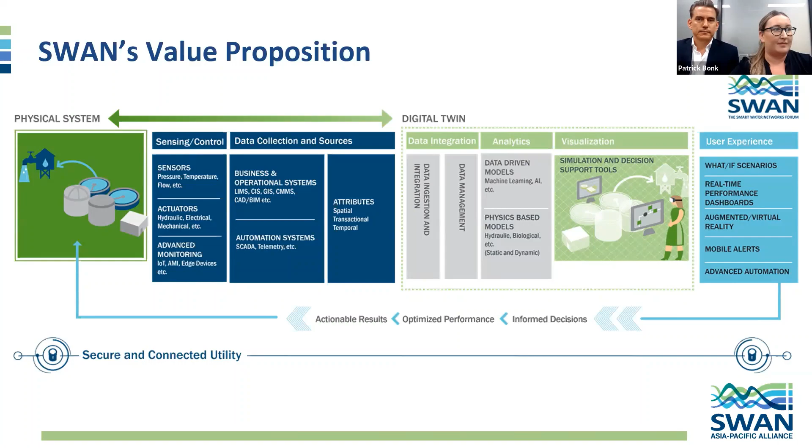Hi everybody, I'm Shanshan from National Chiao Tung University. I'm also the Secretary General of Water Affairs Organization, Taiwan. It's my pleasure to present the development status of the smart water and wastewater platform in WAOT.

Let's introduce WAOT first. It's a close co-work partner with industry, government, university, and institute to develop the water industry, including raw water, drinking water, wastewater, and new water. We are also the exchange platform for business and technology, and especially we focus on smart water and wastewater technology.

So we recommend two members of WAOT: one is from GSD for smart wastewater, and the other one from Stantec for smart water. Later, they will have two presentations.

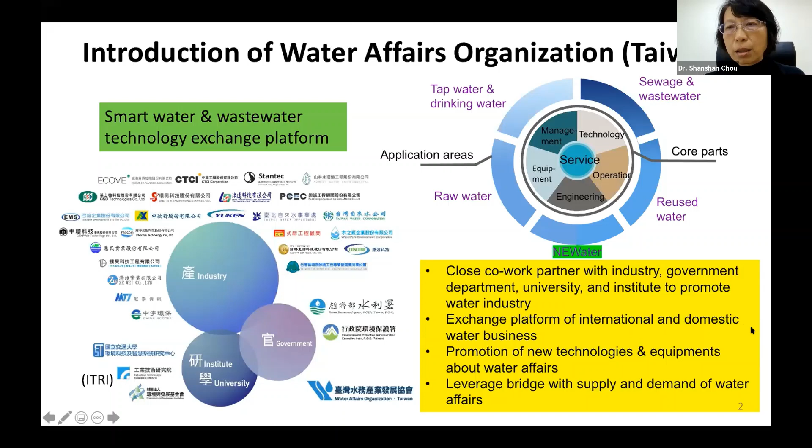Actually, we just held the Intelligent Water Forum 6 days ago in Taiwan. You can see everyone wearing masks in the meeting room. I think it's a special experience since in Taiwan we still can hold a face-to-face seminar during a COVID-19 year.

We had a total of 6 presentations: 2 for water and wastewater from ITRI and GSD. ITRI, the Industrial Technology Research Institute, is a very famous institute in the world, and I also worked at ITRI for over 20 years. There was another presentation on wastewater from ITRI and NCTU, and one on smart water from Taipei Water Department and Taiwan Water Corporation. So, next.

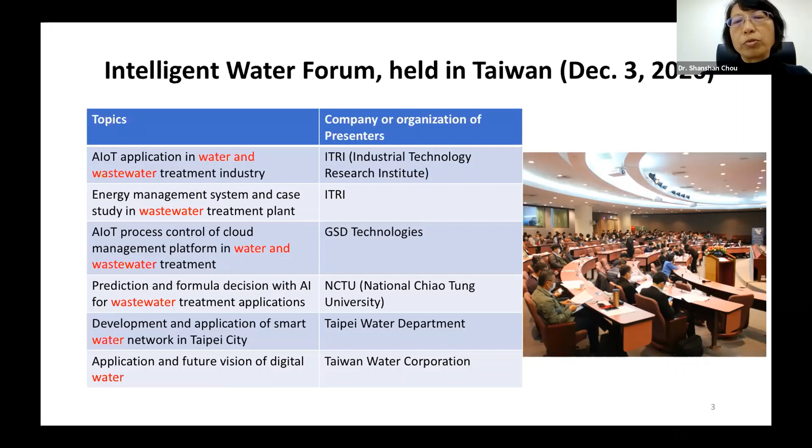I think in Taiwan we have a good multidiscipline integration opportunity, since Taiwan has many good AIoT and ICT component companies. From digitalization and visualization for IoT, to data analysis and data algorithms for AI, Taiwan has good AIoT hardware and software capability. ITRI and WAOT members help the Taiwan government build demo sites, going from intelligent components to intelligent processes, then to intelligent total solutions. So we have many demo sites for different applications. Next.

This presentation shows the prescriptive analytics developed by NCTU, which is an optimal model. AI can determine the lowest cost according to the removal of COD, color, or turbidity from the model. You can see about 20 to 40% of operating costs can be reduced according to the AI decision. Next.

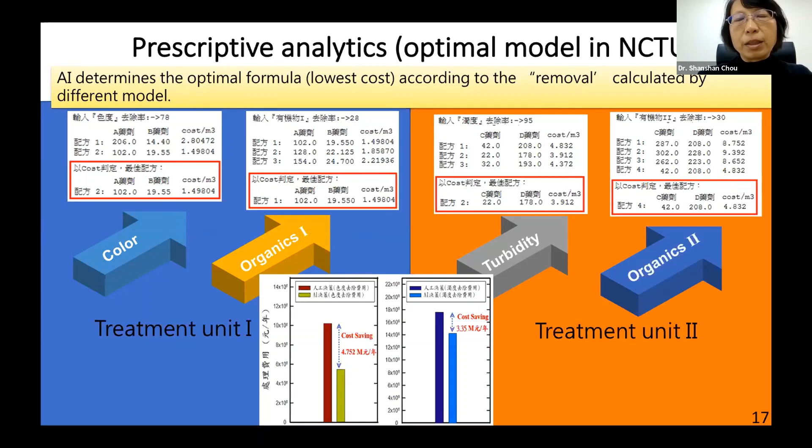This slide shows the smart water status in Taiwan, and 2 famous case studies. One is the smart water network in Taipei City, including the raw water treatment plant through to the end user, from raw water monitoring to clean water quality control. Another is the smart water meter. The benefit is about 40% of water leakage reduced, and 30% of power consumption reduced. Another successful example is smart water supply in the Matsu Islands.

Later, Dr. Chou will show you more. So, next.

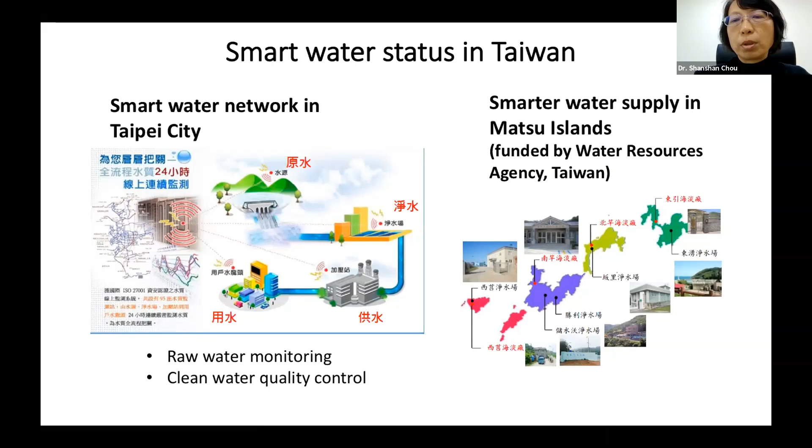Finally, I'll show the smart wastewater status in Taiwan. You can see the smart wastewater management platform developed by ITRI and GSD. The right side is the remote control center developed by ITRI. The left side shows 5 layers developed by GSD, in addition to the 3 common IoT layers in the middle. GSD added 2 layers: one at the bottom, the equipment layer, and the other at the top, the decision maker layer.

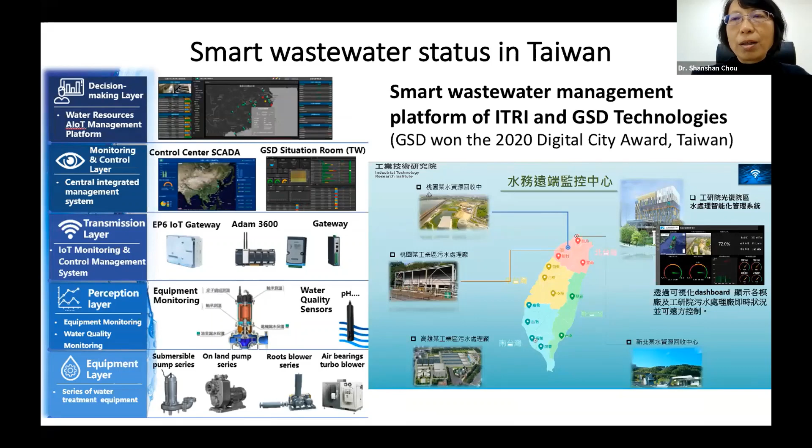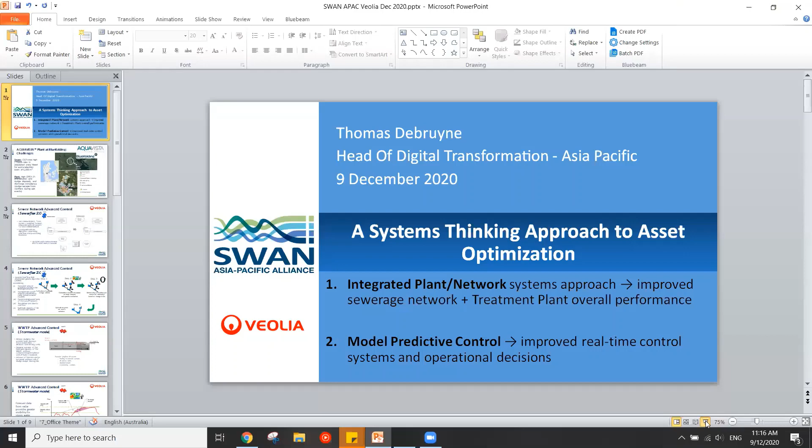Good morning, everyone. Can you hear me well? Yes, we can hear you. Thank you. All right, can you see my screen well? Good, it looks like I'm sharing.

Good morning to you all. First of all, I'd like to thank the Smart Water Networks Forum for allowing me to present this exciting project today. We'll go quite fast since we have a lot to cover in 10 minutes, but feel free to ask any questions during the Q&A session at the end. Today we're going to cover the system thinking approach to asset optimization. If you give me a minute, I'm going to hide this. Yes, that's better. To asset optimization.

So what does it entail exactly? First, we're going to present what the integrated plant network approach is about and how it has improved overall performance. We'll also go through model predictive control, MPC, in a nutshell, and how this has helped the utility and Veolia improve operational decisions.

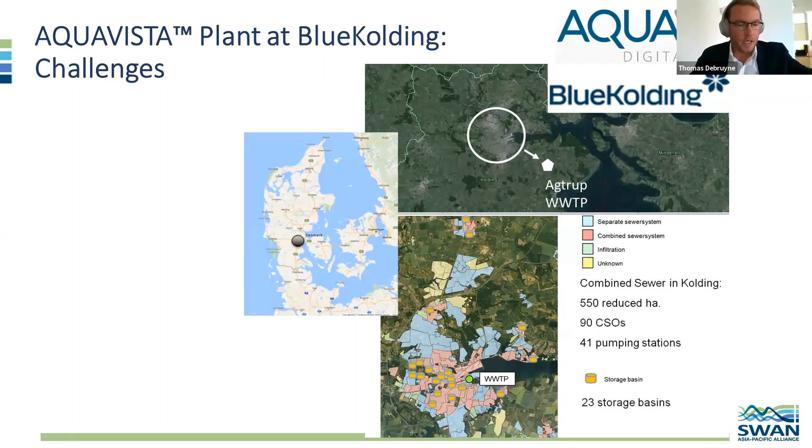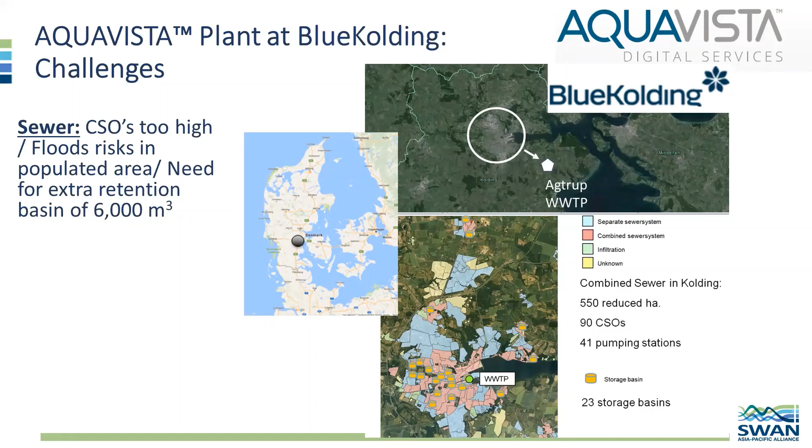Let's have a look at the challenge first. The combined sewer overflow was too high, I'll provide some numbers later. We had flood risks in a populated area, and in a nutshell, a need for an extra retention basin of 6,000 cubes to cope with it. At the wastewater treatment plant, we had very high OPEX for phosphorus precipitation and removal and associated sludge disposal, plus compliance issues due to sludge escape from the clarifier, especially during storm water events. The total overflow at this stage was 150,000 cubes a year, across 30 to 35 events.

And the idea was to reduce to below 6,000 cubic meters a year and number of combined sewer overflow events of less than 10 events per year.

So in 2011, BlueKolding, in collaboration with Veolia Water Technology Kruger, implemented a module called Sewerflex. And after 7 years of successful operation, we upgraded to predictive control. That is what I'm going to introduce today.

I'm going to present at a very high level what we did on the sewer side, and then on the wastewater treatment side. The idea is not to go through in detail—we can explain further during the Q&A—but to present how the integrated approach between both provided benefits between the sewer and the wastewater treatment side.

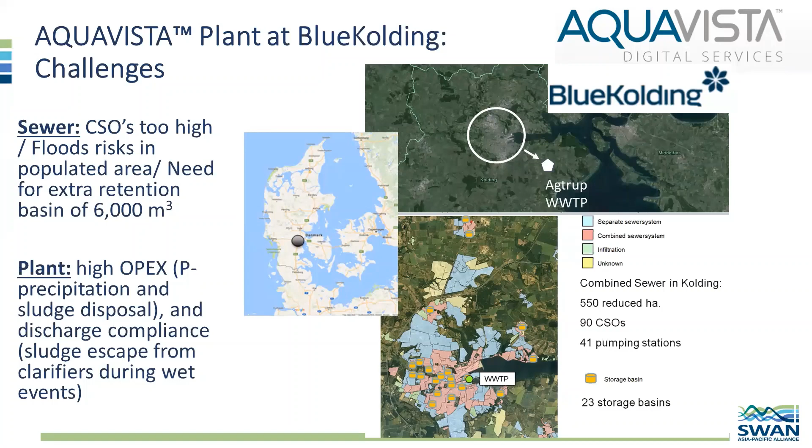On the sewer side, let's start with reactive control versus predictive control. In reactive control, we look at the current status of the different storage basins and flow, and activate actuators based on level, flow rate, and so forth. The idea was to upgrade to predictive control, considering both the weather forecast, using radar data as well as rain gauges.

But also the current status of the different storage volumes and so forth. Instead of saying if the water level is at X, then we action at Y, the idea is to predict: if the future water level, estimating a runoff, will be X, then we action at Y, being either a gate or a pumping station, for instance.

That is updated with measurement and associated set point at a very high granularity, every 5 minutes or so. It's done via a platform called AQUAVISTA, a cloud-based platform from Veolia Water Technology. It is a very highly secured digital portal used by both a third party and the client. The communication is done via an OPC bridge.

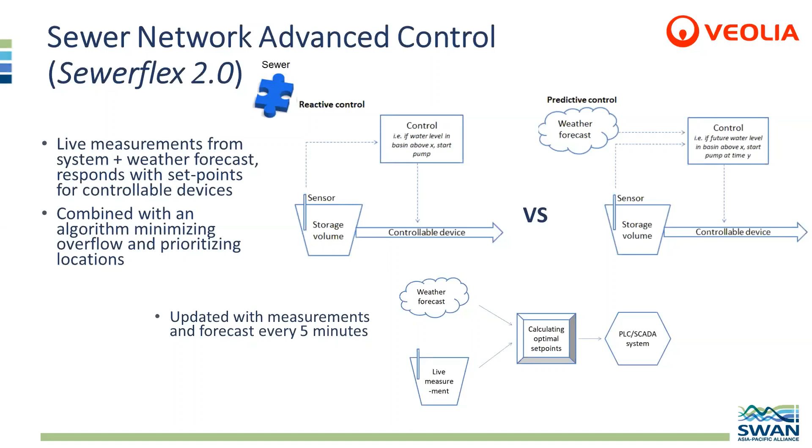The idea is to calculate the different optimal set points using a genetic algorithm, which I'm going to present on the next slide, and to communicate back the different optimized set points to the PLC SCADA system every 5 minutes.

So it is based on a dynamic overflow risk assessment principle that we developed in-house, considering a few different factors: the water volume at the different basins, the expected runoff to come based on forecast data, and estimated uncertainty as well.

Risk mitigation—number 4 is the most important point, the relative cost of the overflow at the different locations—and of course the current state of the hydraulic capacity of the downstream wastewater treatment plant. I will come back on that later.

If we go through the different steps, it's quite simple actually. We estimate the different water storage volumes at stage 1, then based on what's to come—the different runoff modeling and radar forecast—there will be a calculation of the combined sewer overflow risks based on the runoff and specific factors of the different basins.

After that, there will be some calculation made to minimize the overflow risks based on location across the different catchments. Then an optimal set point will be sent to the local PLC SCADA to be actioned, again done every 5 minutes. I would like to come back on point 4, which is the innovation behind this.

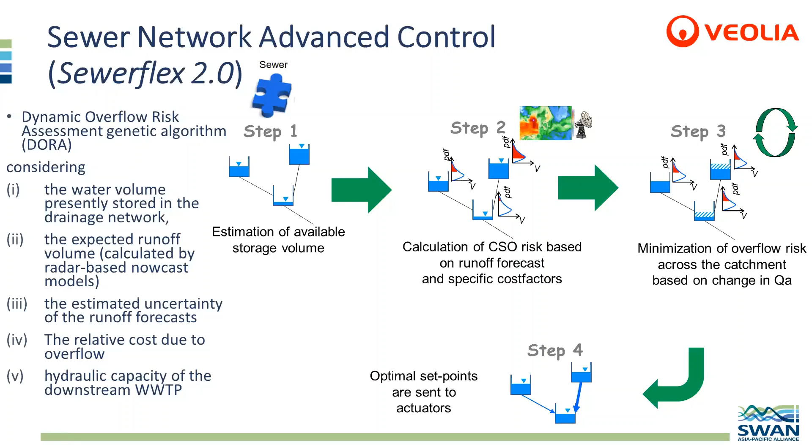On the wastewater treatment side, again very much in a nutshell, we have put in place a mode that we call Stormwater mode. It's an operational mode triggered by the inlet flow or the predicted flow and the current activated sludge distribution status in the system.

The idea is to retain a higher amount of sludge in the process tank to minimize the sludge blanket level in the clarifier, to minimize sludge escape in case of a high wet weather event.

Now, the settling capacity is based on the activated sludge plant, and I will show you an example just after that. So you might have heard of the system before called aeration tank settling. You have a quick example here on the right where it's a simple plug flow activated sludge system.

The idea is when the storm water mode is triggered to allow for further settling of the sludge in the aeration basin, in the aeration anoxic remaining section, and a lower MLSS content to go through the clarifier downstream to avoid sludge escape during a high wet weather flow.

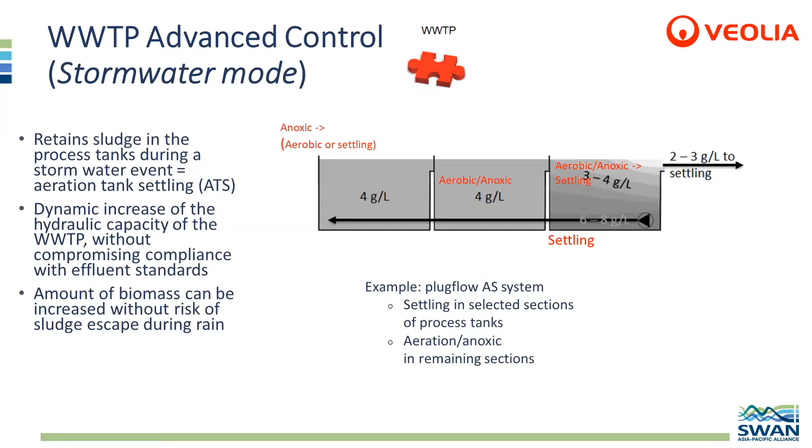Now, it is a dynamic system, as we will see after that. It is activated and deactivated based on the weather forecast and the current status of the inlet flow as well. Like for the sewer system, prediction is everything, and it's changing the way we look at this feature as well. So the forecast data from the radar can provide much greater visibility on the stormwater feature.

If we're able to predict a high wet weather event based on the level we have on the upstream sewer network, but also radar data, we will be able to get the wastewater treatment plant ready upstream and get the plant ready before there is a high inlet flow coming and avoid altogether sludge escape from the clarifier downstream.

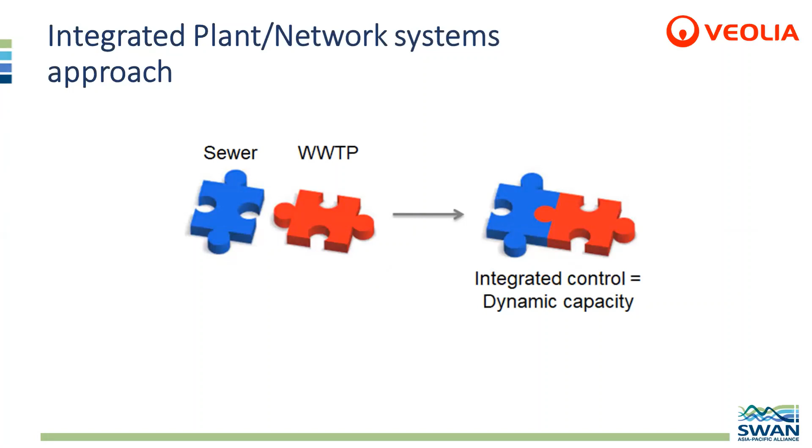Sewerflex, which was a module that we discussed about, obviously can predict the inflow into the wastewater treatment plant based on simple modeling and forecast data, which will be, of course, a great bonus to know what's coming to us.

But also we can equalize the flow rate during dry weather, as people who understand biological treatment know, having a stable flow rate with hydraulic and biological intake is of great benefit.

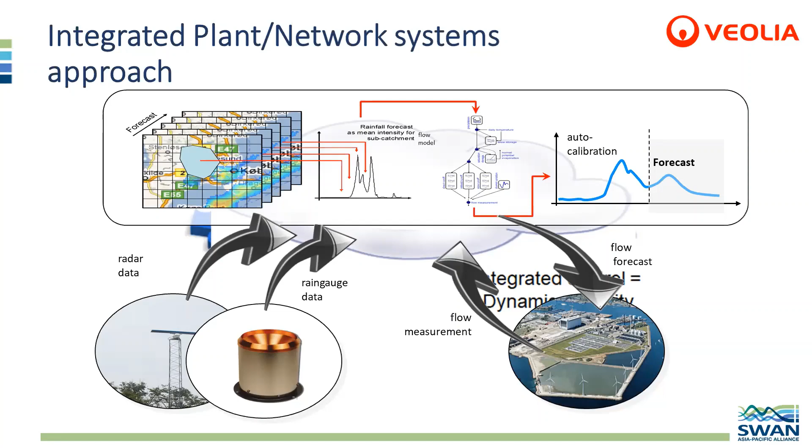But also during high wet weather flow, the idea is to optimize the flow using the extra capacity we might have on the sewer side while mitigating combined sewer overflow risks as well.

So it is always considered, and I will go a bit fast because I'm late, as a combination of conventional upgrade and upgrade using SMART in a nutshell.

So the status before, as explained in the introduction, was our current retention basin of 800 meter cube. We could have gone using traditional thinking to 6,000 cubes to be able to overcome the issue we have at the start. And we came down in 2011 in upgrading the retention basin to a much lower capacity, providing savings of 2 million euro.

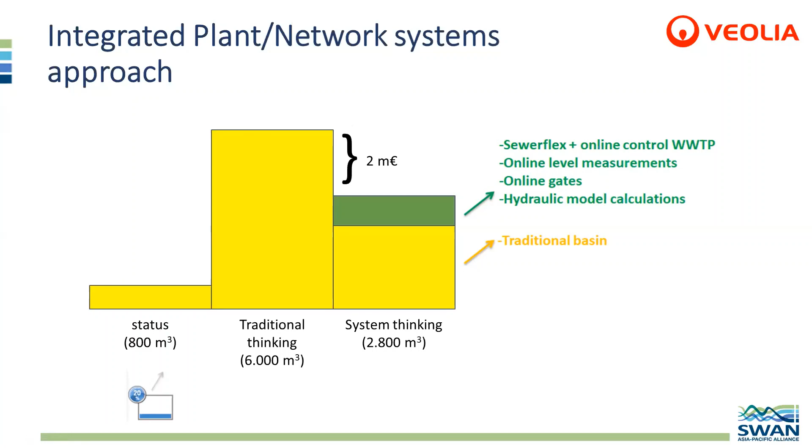But on top of that, implementing advanced control and predictive control in place to ensure that we remain compliant and at the same time use both capacity in combination of the sewer and the wastewater treatment plant. To conclude, that's a slide of the current benefits.

We've been working with BlueKolding for 20 years now. The benefits you see here on the right have been provided by the features we talked today, but not only. We have implemented other optimization features as well. We won't have time to go through them today. I will be happy to do so at a separate call if you like, and that has been providing great benefits to BlueKolding and Veolia at the same time. Thank you for your attention.

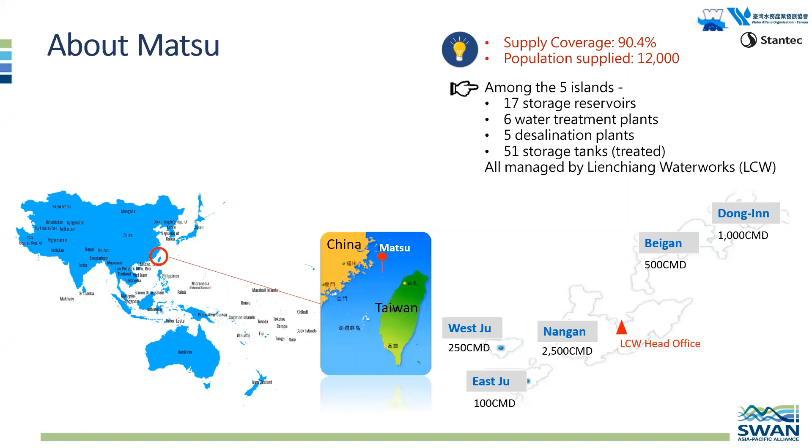A lot of the issues and challenges for LCW are actually related to its remote location. Aging infrastructure and supply and distribution issues are faced by almost every other utility in the world. However, the remote location is a disadvantage for LCW because world-class solution providers and equipment vendors are less likely to be attracted to such a small island to sell their best products. Being so remote, you don't see a big influx of fresh graduates or experienced engineers coming to work in such a small place. So there's generally an insufficient number of skilled or experienced operators for LCW, and more generically, there's a shortage of manpower, which is already affecting their customer services.

On the management side, currently there's a lack of means for information to be shared across different islands, and the level of monitoring is insufficient. So it's a bit hard for LCW to be able to see and hear what's going on in some of the other islands, and to explore and find out about problems, let alone to actually improve on their supply efficiency.

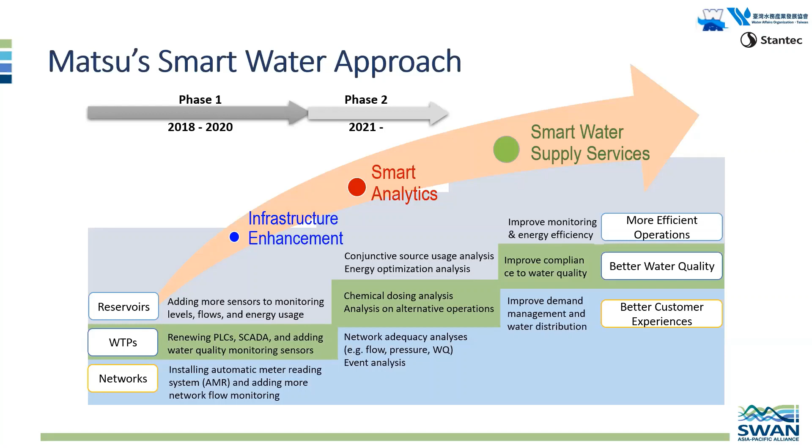They're trying to improve the infrastructure within phase 1, and after that foundation has been laid, once all the data information starts flowing, they'll be ready to move into phase 2, which will focus on smart analytics to establish baselines, identify bottlenecks, and resolve events at a much faster rate. Eventually, LCW wants to be able to achieve what they call smart services, which on the right-hand side include more efficient operations, better water quality, and better customer experiences overall.

So phase one took place between 2018 and is still happening to date. Part of it is to make sure this catchment to tap approach, all the way from raw water to finished water, infrastructure can be built up to support the next phase smart water solution implementation, and also to make sure LCW is able to look at all the data information from their head office.

Underneath in the table is just a summary of major items and quantities. More notably is the AMR meters. This is a 100% coverage AMR system, so across the 5 islands, every single account would have an AMR meter installed. I believe that's the first of its kind in Taiwan, and maybe the same for Asia.

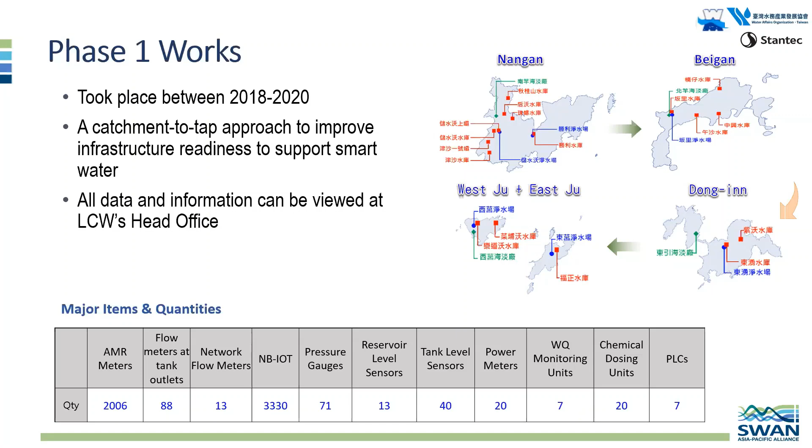There's already been some early gains opportunities, and LCW made sure these have been captured. On the left-hand side, with AMR, you don't have to wait for and rely on your meter readers to come back every 2 months before you can identify a usage problem.

So this is what happened. They look at the AMR usage, and LCW found out this local restaurant in the picture here to have an unusually large usage. So they decided to pay them a visit. Together with the owner of the restaurant, they quickly found out that they left the tap running in the backyard, and turning this off helped the owner save 92% of their water bill in the next water bill.

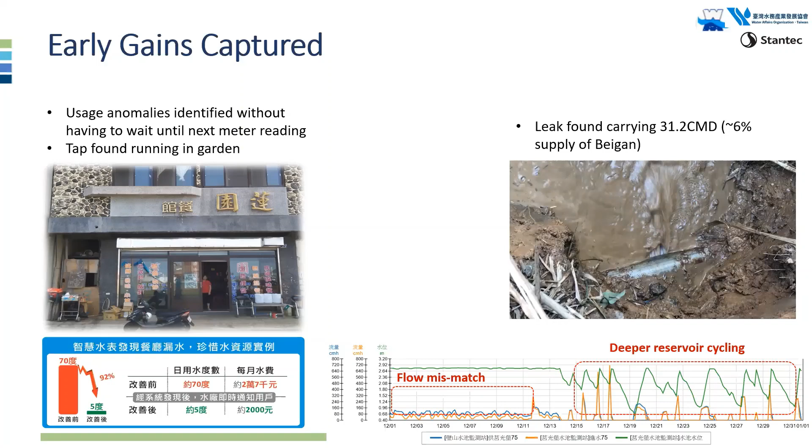Although this is beyond the customer meter, and whatever gets wasted actually gets paid to LCW, this is about being ethical on an island that has water resource restrictions. So you've got to do the right thing, basically. On the right-hand side, also under the AMR system, leaks are quicker to be identified and repaired.

So what's ahead for Matsu? Over the next 3 years, the focus would be on smart analytics and using it to make sure benefits can be derived for both the utility and also for the customers.

Initial successes of Matsu has also boosted confidence levels for many other utilities across Taiwan, and some of these utilities are already planning similar things for their own water supply. So this would mean business opportunities for all of us.

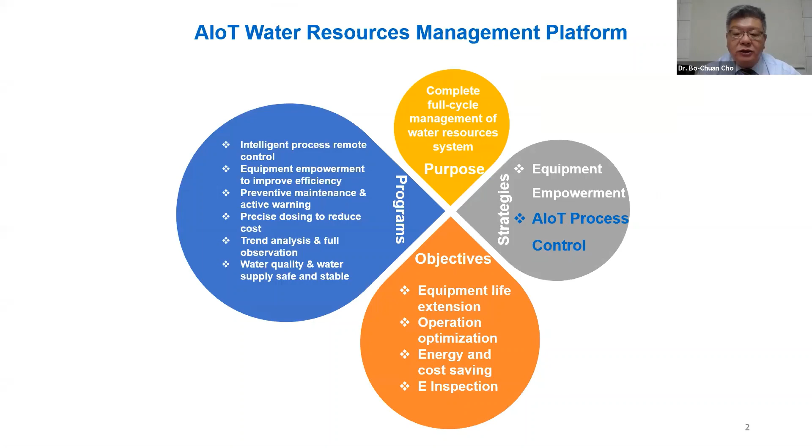AIoT Process Control for Water and Wastewater Treatment application is one of the developed strategies in GSD's AIoT Resources Management Platform. The purpose of the AIoT Process Management Platform is to optimize operational performance in water and wastewater treatment systems.

This AIoT Process Control Management Platform includes intelligence process monitoring and control modules, and AI simulation and prediction models, which are developed by edge data collection and computing from water and wastewater treatment processes.

Being consisted of biological and chemical programs, this AIoT process control management platform aims to achieve the objectives of operation, energy, and expenditure optimization through procedures of real-time monitoring, dynamic control, intelligent operation, and AI tuning.

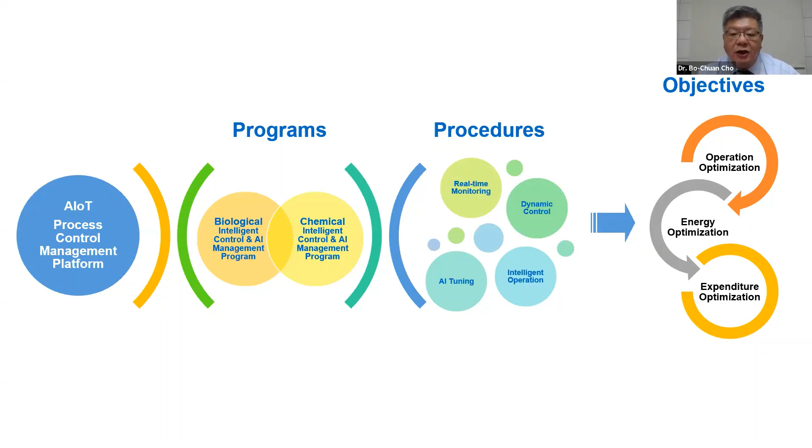There are 8 intelligent process monitoring and control modules, 4 AI control generation models, and 4 AI simulation and prediction models in biological intelligent control and the AI management program, which can be applied to A2O, AO, and activated sludge processes.

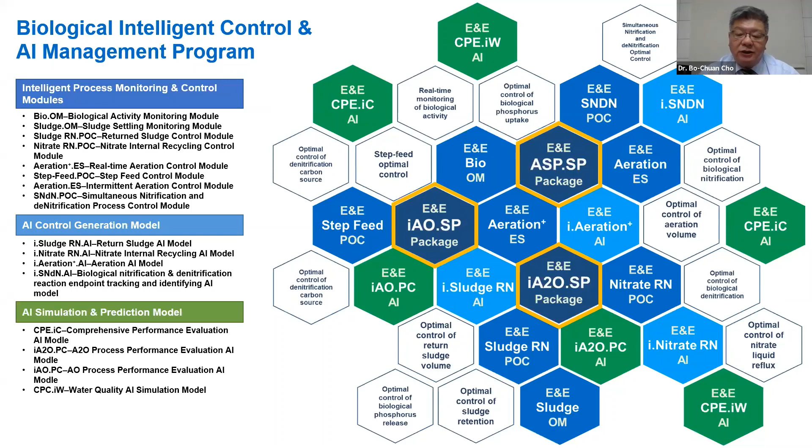The operational results show that the total nitrogen, ammonia nitrogen, and total phosphorus removal rates can be increased to 79.7%, 94.5%, and 99.5%, respectively, by biological intelligent control and the AI management platform.

Blower's average power savings are 32.3%, 31.9%, and 46.1%, respectively, in A2O, AO, and activated sludge processes. Total power savings are 24.7%, 33.1%, and 59.8%, respectively.

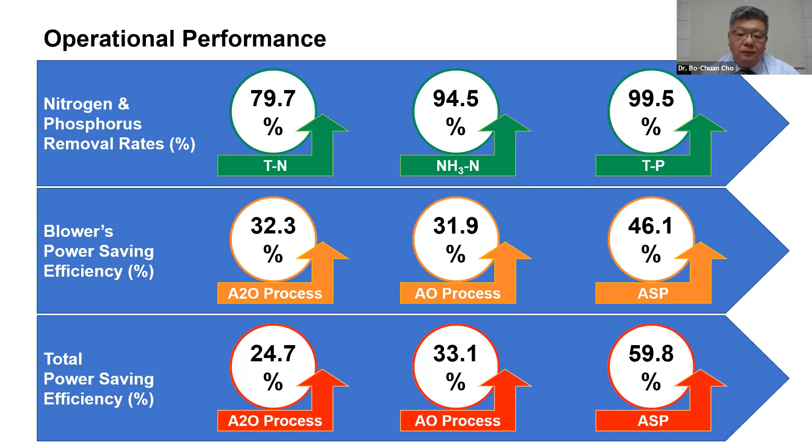The Chemical Intelligent Control and AI Management Program includes 8 intelligent process monitoring and control modules, 1 AI control generation model, and 2 AI simulation and prediction models for chemical neutralization, oxidation reduction, coagulation and precipitation reactions, and advanced oxidation processes.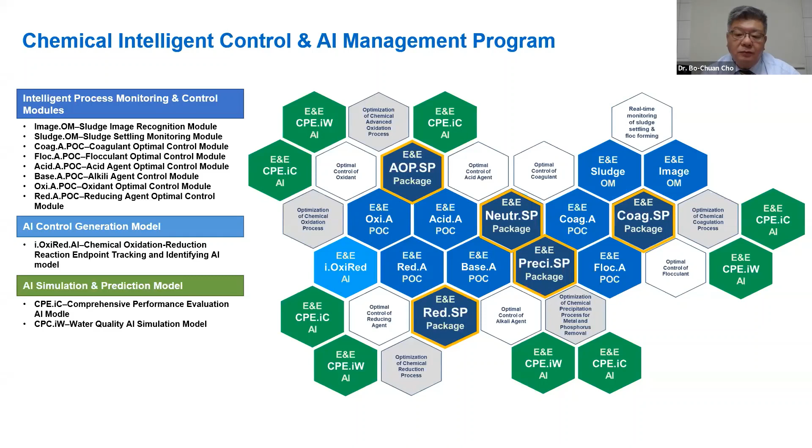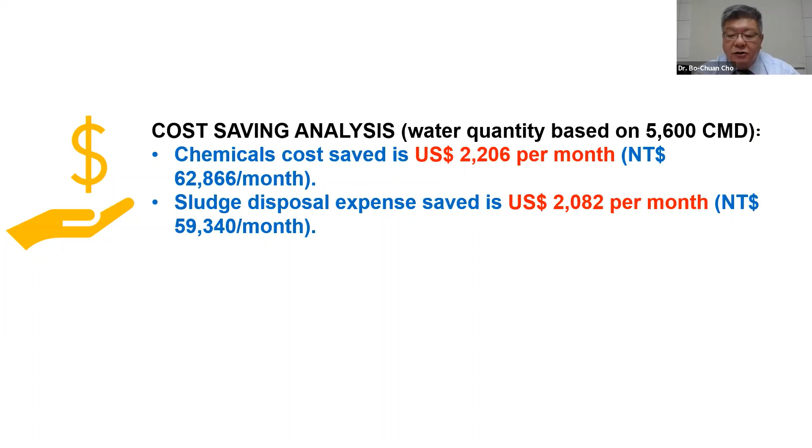During the Chemical Intelligent Control and AI Management Program applied to the semiconductor wastewater treatment plant, the saved chemical dosing cost is $2,206 per month, and the sludge disposal expense savings is $2,082 per month, based on a water quantity of 5,600 cubic meters per day.

Our verification cases reveal that GSD's AIoT intelligent control and AI management platform have distinguishing features of real-time dynamic control, empirical knowledge in collaboration, control decision mastery, control module independence and adaptability, control target accuracy, and intelligent control optimization.

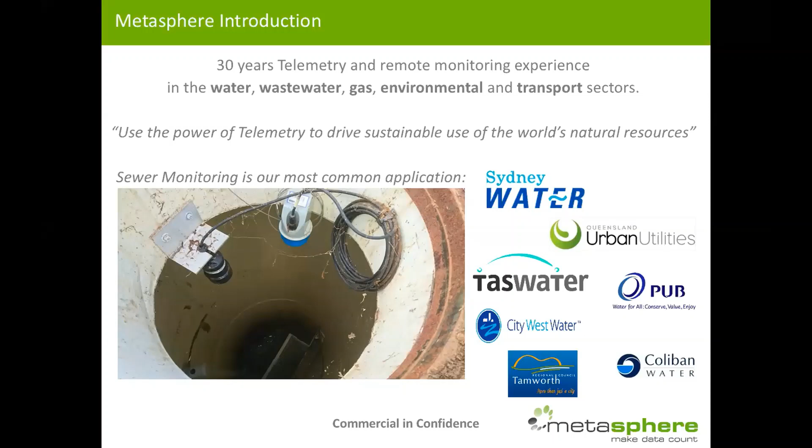We undertake lots of remote monitoring, different applications from rain gauging through to pressure and flow, river and dam levels, and water quality. But sewer monitoring is probably our most common application. Within sewer monitoring, we get involved in sewer level, velocity, flow, and H2S monitoring, but sewer level and alarming for sewer blockages and spills is probably our most common application. There's a few high profile clients on the right-hand side there that we undertake this work for.

There are a lot of very good reasons to invest in sewer level monitoring and alarming.

Preventing sewer blockages and overflows can support utilities and councils in many ways. It certainly helps improve the smooth running of their operations, not having to deal with blockages and spills. It helps meet regulatory compliance and reporting, and helps avoid environmental agency fines, which are becoming more prevalent and harsher as time goes on.

It helps improve customer and community experience and satisfaction. Fewer spills and disruption means less human waste in parks and communities, and even in people's homes, which in turn helps reduce the health and safety risk to both the community and the utility and council crews that have to deal with it. It also helps prevent reputational damage. No council or utility likes to be on the front page of the papers for the wrong reasons, particularly sewer spills.

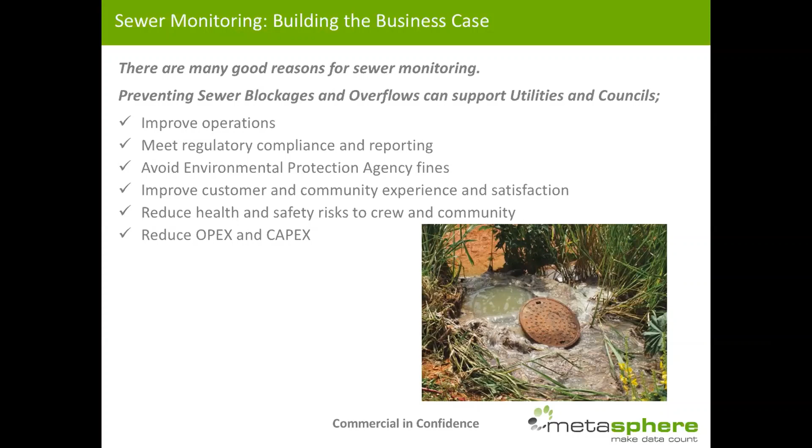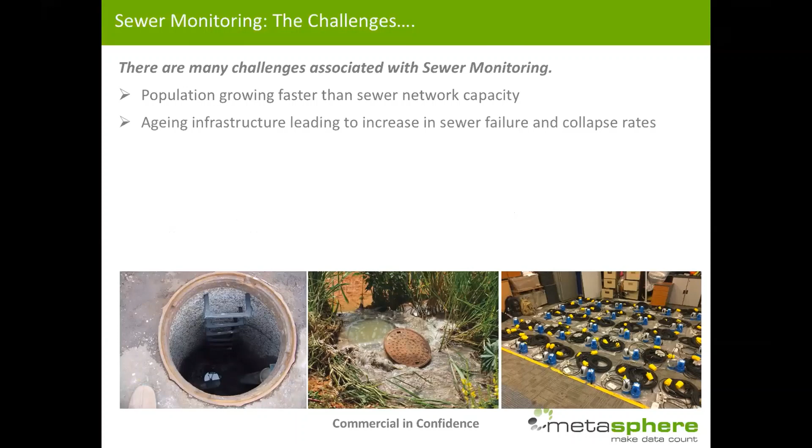There are many challenges associated with sewer level monitoring. It is possibly one of the hardest remote monitoring applications to undertake successfully. Some of the challenges include the simple fact that population is outgrowing the sewer network capacity, and much of the sewer network in major cities is aging, leading to an increase in sewer failure and collapse rates.

Community education is an ongoing challenge, trying to prevent the wrong things being flushed down toilets and into sewers, which of course leads to blockages, fatbergs that we see in the news, and general issues.

It is, for those working in the sewer environment, a potentially dangerous environment. Build up of gases, confined space, working from height are all very real challenges for this kind of work.

Technology-wise, it's a very harsh environment for technologies to operate in. The build-up of gases does cause a lot of issues, along with high relative humidity. So yeah, it's a very challenging, possibly the most challenging environment for technology to work in.

The cost of existing technology, and specifically the installation costs at the moment, is too high for mass deployment. Mass deployment is required to gain the big data needed to develop smart wastewater networks through AI or ML. Alarming and response times still remain largely reactive rather than proactive. You may get a few minutes or up to half an hour's warning time of a potential blockage or spill.

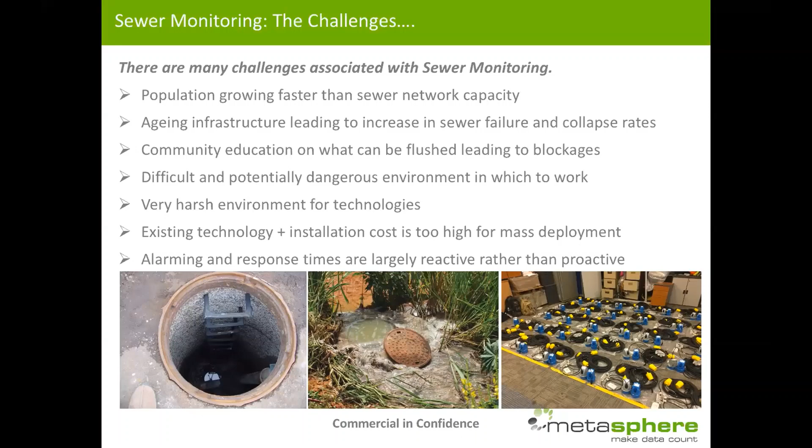But that still remains a challenging timescale for utilities or councils to respond within. So more and more, the ambition of utilities and councils we see is that they are trying to move from being reactive to proactive, and to use the power of AI and ML to gain predictive intelligence, ultimately trying to get ahead of an event, to predict when an event is going to happen before it has, and to take action to prevent it from occurring.

So the trends we see within the industry are that predictive intelligence via AI and ML requires big data, which requires mass deployment of sensors across the network. Some of the big questions utilities and organisations are grappling with are how to mass deploy sensors across a whole network cost effectively, how to handle thousands of incoming data points and alarms, and how to process all that data into something useful and proactive.

So Metasphere have recognised that industry trend, and we have developed a new umbrella suite of systems called MetaSense. We believe it's the next generation of remote monitoring, enabling cost-effective mass deployment of IoT sensors to gather wide area data required for predictive intelligence, allowing users to get ahead of the event and take action.

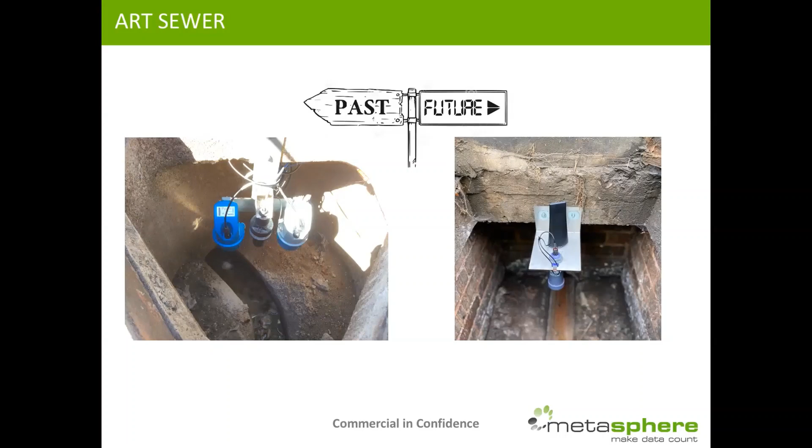If you can move to the next slide, that would be great, thank you. The next steps for ART Sewer are, it was introduced to the market yesterday. The Metasphere team are available for discussions, and the product will be available early next year. We are very hopeful that this is a big step forward for utilities looking to develop smart wastewater network systems and gain visibility across the whole network at an affordable cost, and to gain the power of AI and ML for predictive intelligence to prevent sewer blockages and spills. Thank you very much. More than happy to take any questions.

Thanks so much, Paul. I think we've got time for a couple questions before we wrap up. One for you, Paul Hart. Do any of your customers have their systems directly messaging environmental regulators when a system overflows, as opposed to it being managed by the customer itself?

That's a good question. I don't know whether any of our major utility clients have direct messaging to the Environmental Protection Agency in Australia, for example. I know they have very close contact with them and are being increasingly proactive with their sewer monitoring in order to show environmental protection agencies that they are doing everything they can to prevent such occurrences.